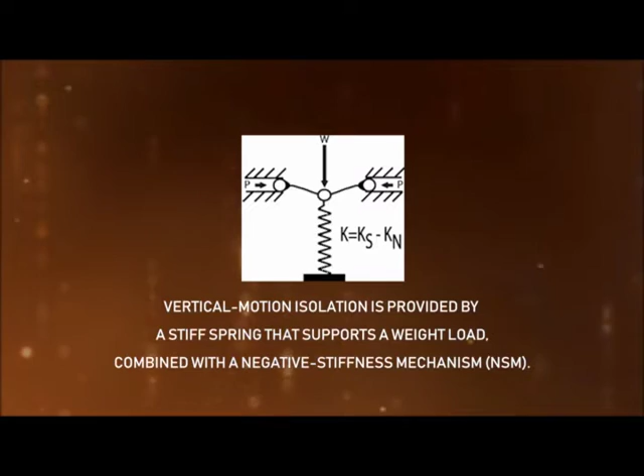This system typically uses three isolators that are stacked in series: a tilt motion isolator on top of a horizontal motion isolator on top of a vertical motion isolator. Vertical motion isolation is provided by a stiff spring that supports a weight load combined with a negative stiffness mechanism. The net vertical stiffness is made very low without affecting the static load supporting capability of the spring.

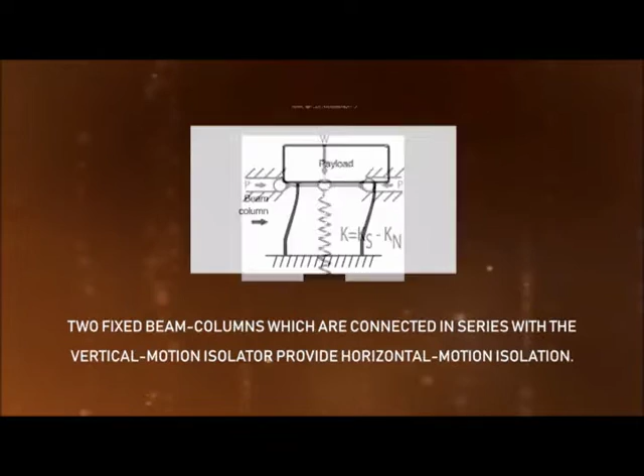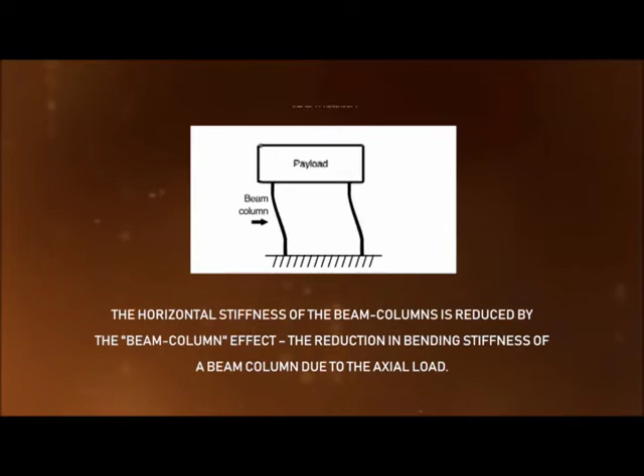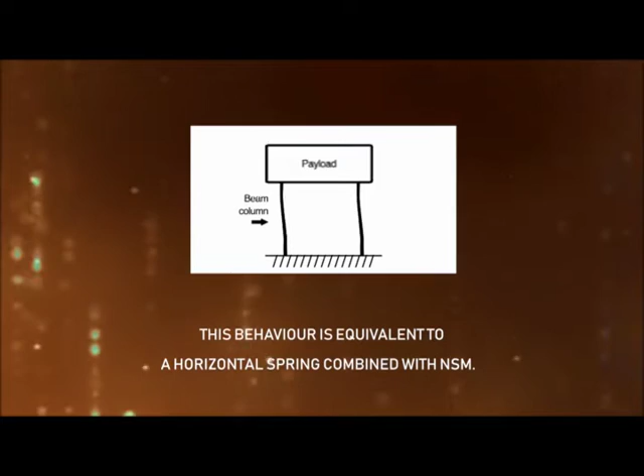Two fixed beam columns which are connected in series with the vertical motion isolator provide horizontal motion isolation. The horizontal stiffness of the beam columns is reduced by the beam column effect. The beam column effect is the reduction in bending stiffness of a beam column due to the axial load. This behavior is equivalent to a horizontal spring combined with a negative stiffness mechanism. A tilt pad serves as the tilt motion isolator.

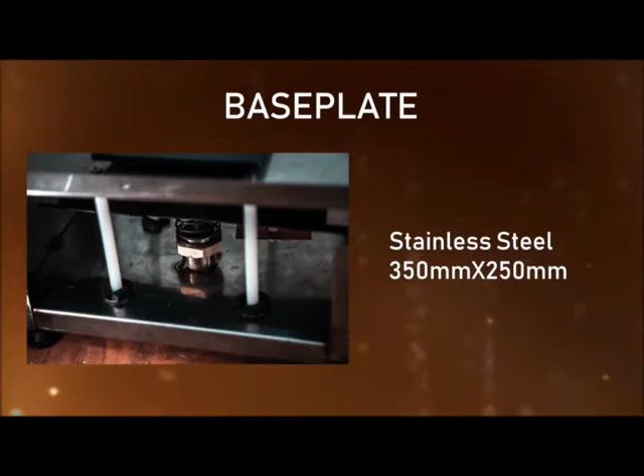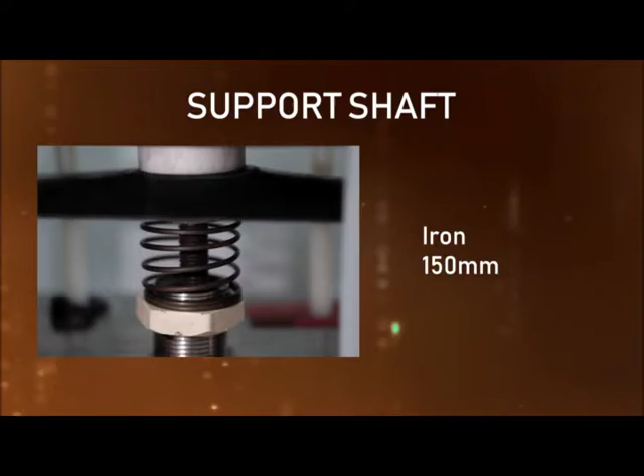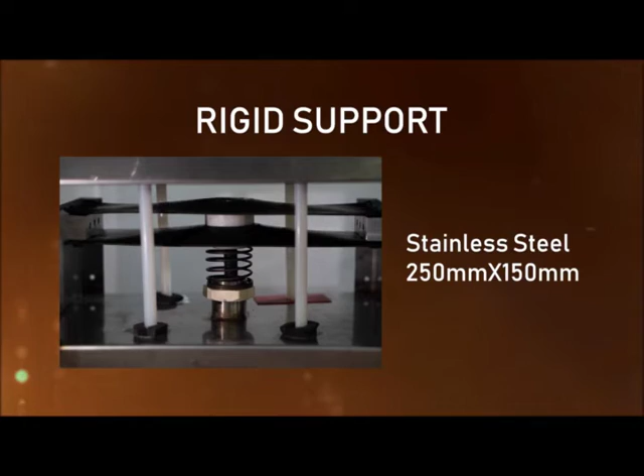Base plate, lower column plate, beam column, support shaft, spring bottom holder with load adjustment screw, spring top holder, spring, upper column plate, flexure rubber sheet, sheet holder, tilt pad, top plate, rigid support, leveling screw, enclosure.

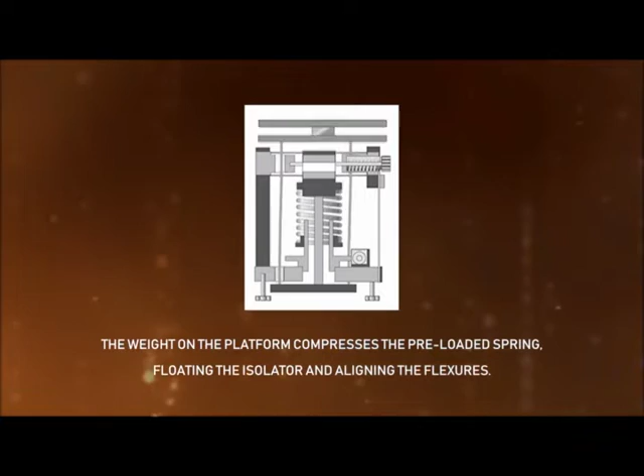The vertical vibrations are isolated by the spring's interaction with the passive flexure made of rubber sheet. The weight on the platform compresses the preloaded spring, floating the isolator and aligning the flexures. These applied compressive forces create the negative stiffness mechanism, which reduces the isolator stiffness and can be made to approach zero while the weight load is still supported by the spring.

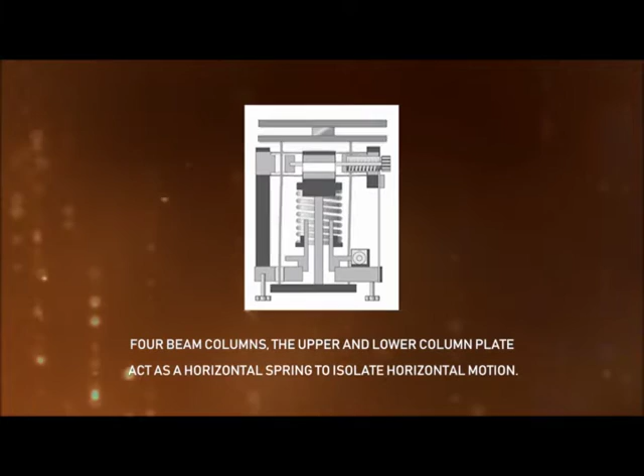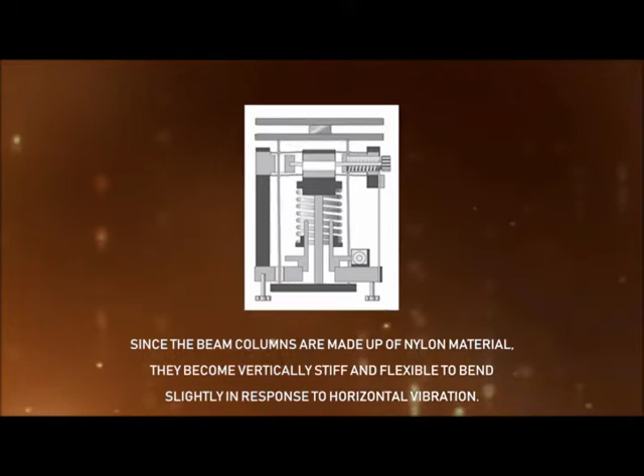Four beam columns, with the upper and lower column plates, act as a horizontal spring to isolate horizontal motion. Since the beam columns are made of nylon material, they are vertically stiff and flexible enough to bend slightly in response to horizontal vibration. The weight on the deflected beam columns reduces the lateral stiffness of the spring.

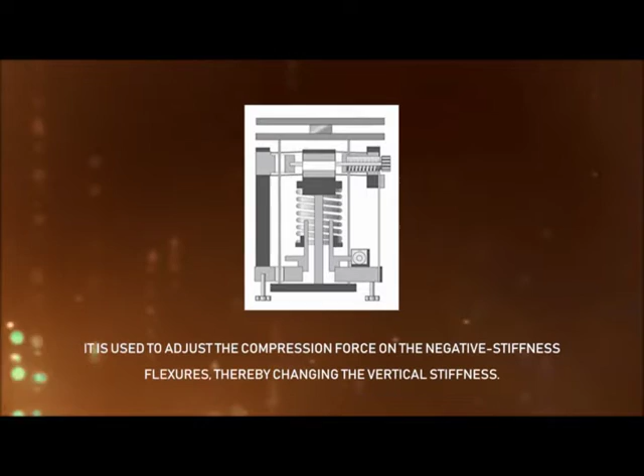A load adjustment screw is used to adjust for varying weight loads by raising or lowering the base of the support spring to keep the flexures in their straight, unbent operating position. It is used to adjust the compression force on the negative stiffness flexures, thereby changing the vertical stiffness.

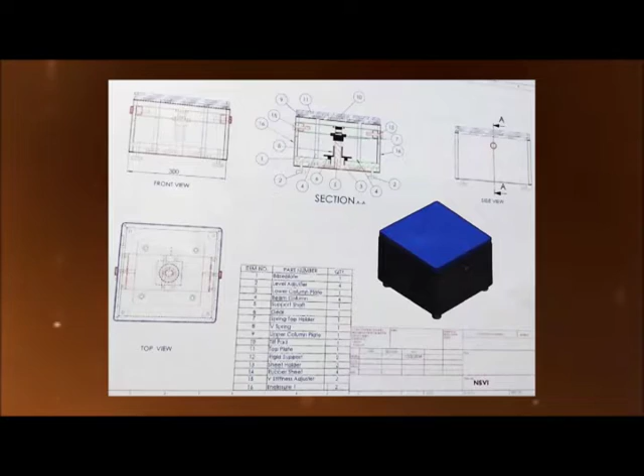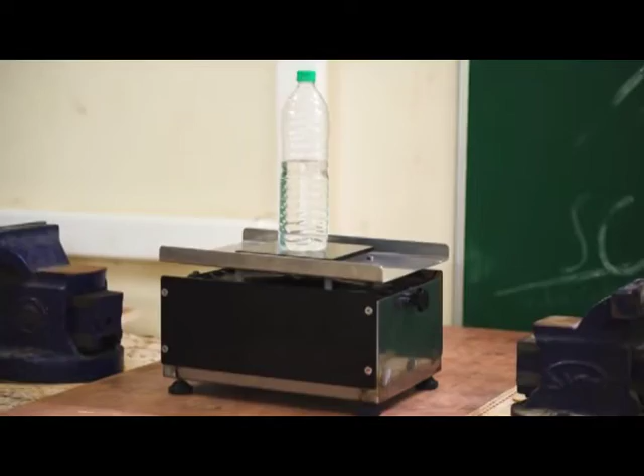The setup consists of the product, two transparent bottles filled with water, plywood, a solid weight, a spring, and a drilling machine. The product is placed on the plywood along with the weight and the spring. Among the bottles, one is placed on the plywood and the other one is placed on top of the product. The drilling machine is used to vibrate the plywood.

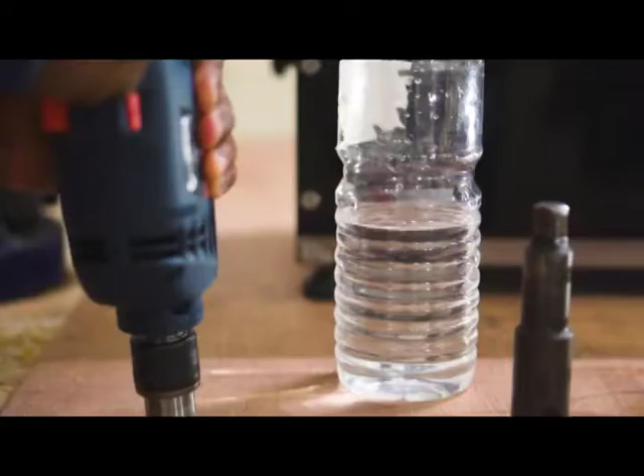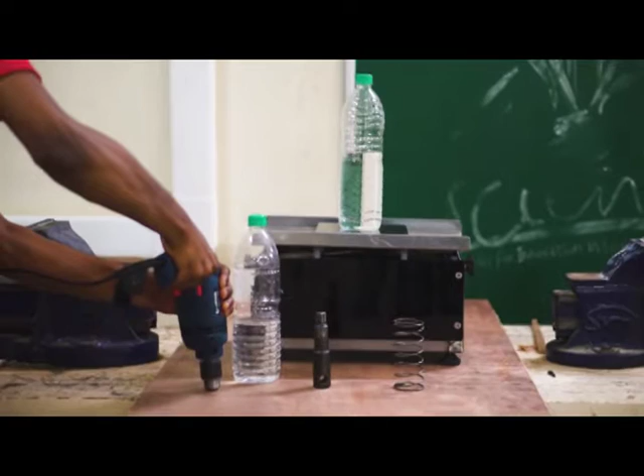These vibrations are observed in the form of swirls inside the bottle. All the objects placed on the plywood started moving due to the vibrations. But the effect of vibration is not seen in the bottle placed on top of our product. When we place the weight on top of our product, it is clearly seen that even in the presence of vibrations, the weight stays in the same position. Thus, from this demonstration, we conclude that the vibration is isolated through this negative stiffness mechanism.

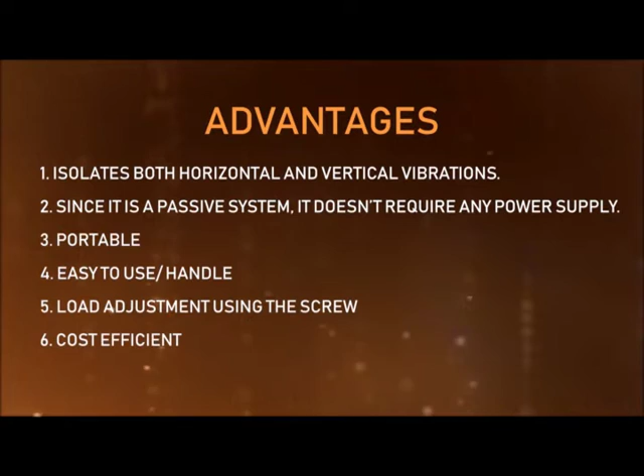It isolates both horizontal and vertical vibrations. Since it is a passive system, it doesn't require any power supply. It is portable, easy to use and handle, has load adjustment using the screw, and is cost efficient.

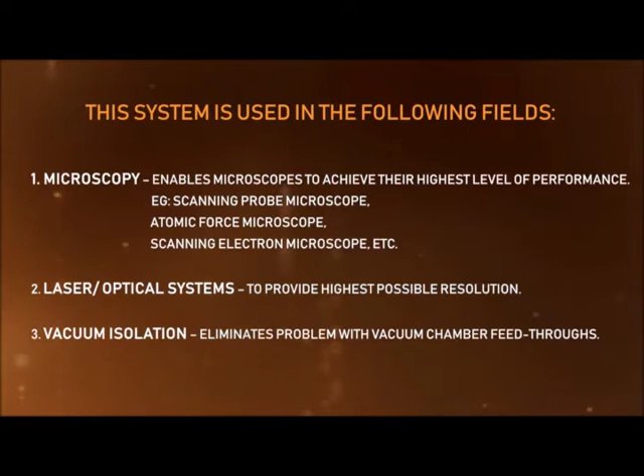This system is used in the following fields. Microscopy: enables microscopes to achieve their highest level of performance, for example scanning probe microscopes, atomic force microscopes, scanning electron microscopes, etc. Laser or optical systems: to provide the highest possible resolution. Vacuum isolation: eliminates problems with vacuum chamber feed-throughs.

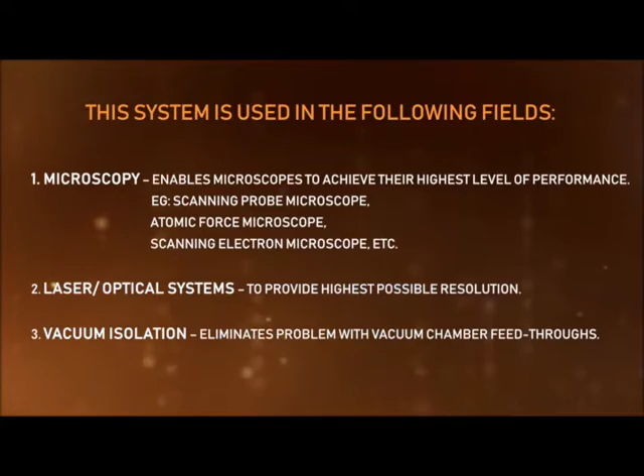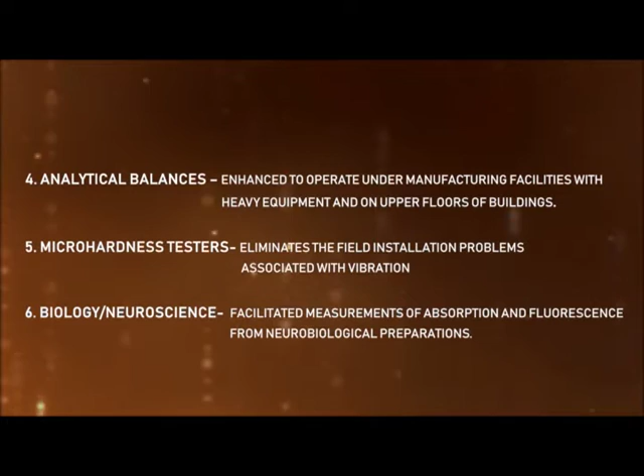Analytical balances: enhanced to operate in manufacturing facilities with heavy equipment and on upper floors of buildings. Micro hardness testers: eliminates the field installation problems associated with vibration. Biology or neuroscience: facilitates measurements of absorption and fluorescence from neurobiological preparations. Among these applications, we have chosen three potential customers and proceeded with customer evaluation of our product.